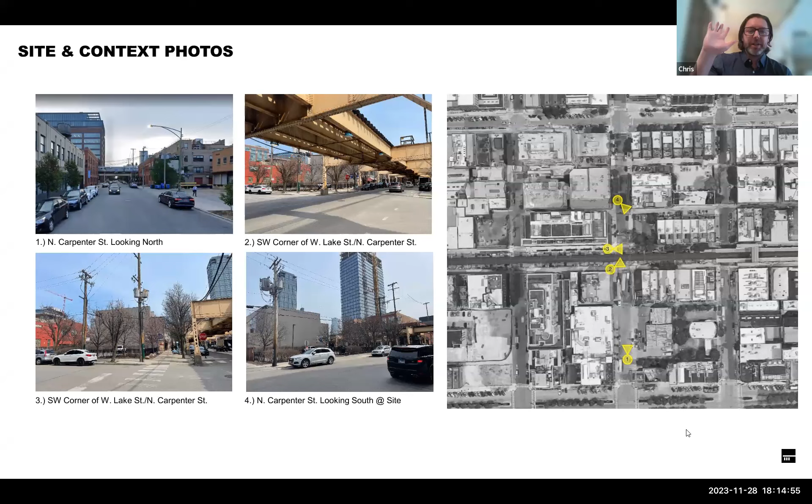Hi, I'm Chris. I lead the global architecture practice for Moser. My colleagues Jason and Roshni are going to speak a little bit about the building, its impact on the community, and the sustainability objectives that we're incorporating into the building.

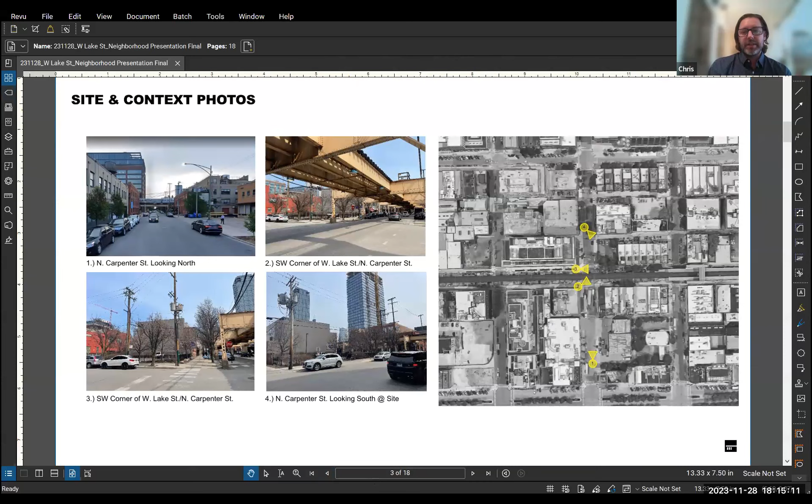Here's a few shots of the site that everyone's speaking about, that I think many of you are familiar with, at the corner of Lake and Carpenter. Go to the next slide, Jason.

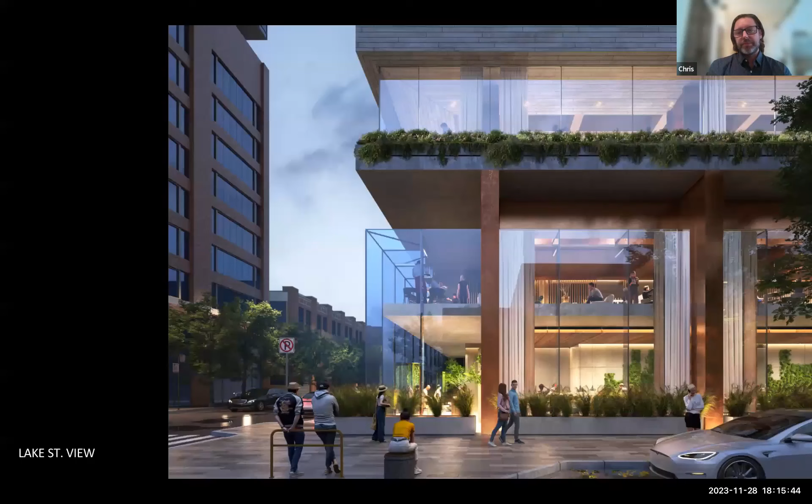Next slide, Jason. I'm going to pass it over to Jason to go through each one of the views that we've developed, and then to Roshni to talk about the sustainability objectives.

Good evening, everyone. So just to go through a few of the images here. First, we have the Lake Street view. This is right at the corner of Lake Street and North Carpenter, showing the amenity space as well as the entrance of the building.

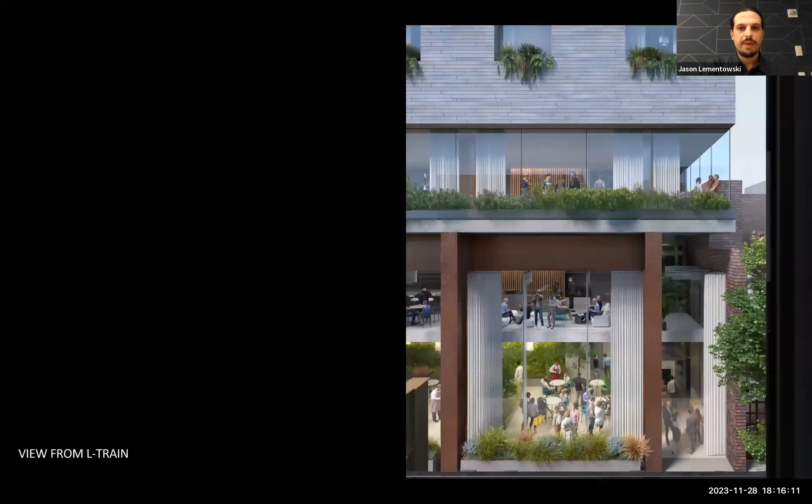I'll just kind of pass through these. The next view is from the elevated train line, so it shows that we still have the connection between the hotel space to the community. There's that visual connection.

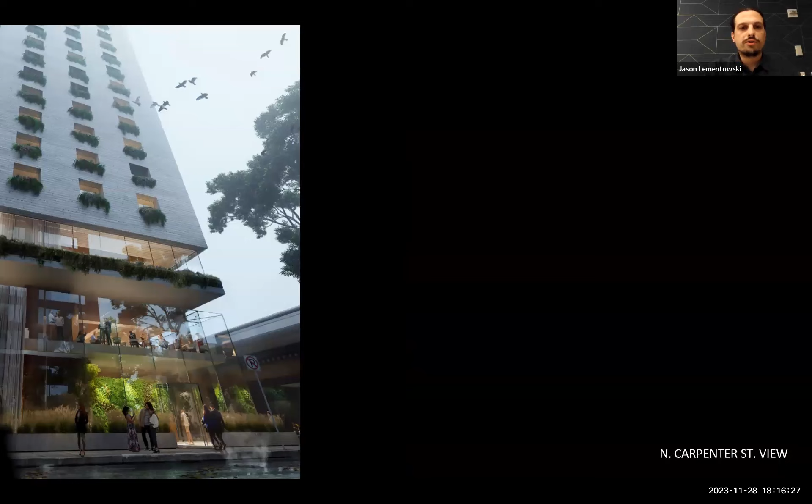Moving along North Carpenter Street, again, just showing how we have the biophilia and the materials contrasting, but then playing with the existing infrastructure that is on our surrounding site.

Just to give a quick breakdown of the building program: the first 3 floors are amenity spaces, and then moving up we have 11 floors of hoteling, with a rooftop lounge at the top.

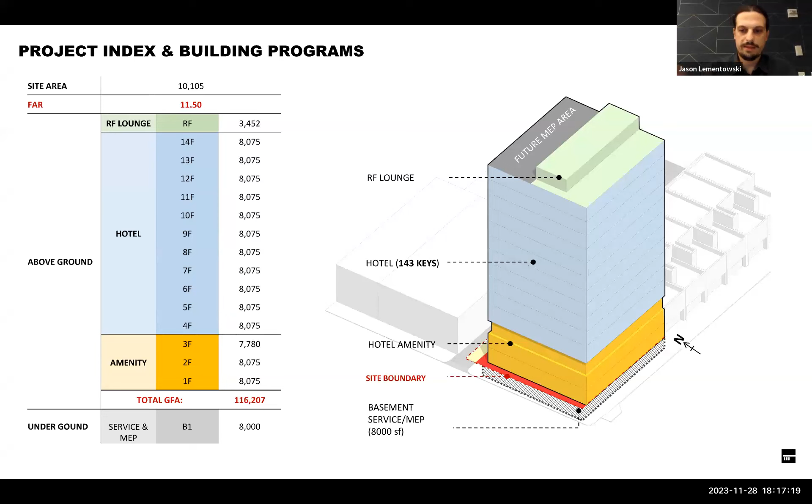Like Errol, I have a great affinity for Chicago. I went to the Art Institute of Chicago, and what we're really trying to do with the ownership team is develop a building that is focused on the community, but also incorporates being in harmony with nature.

Roshni is going to take us through some of the sustainability objectives that we have, as the team has been mentioning. This building is in alignment with Chicago's climate action plan, and actually exceeds many of the goals that Chicago has laid out. Over to you, Roshni, to go through the next slides.

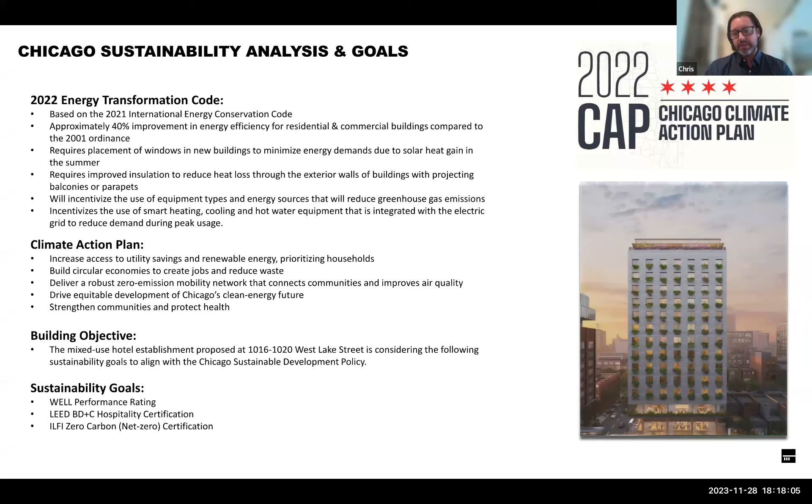Thank you, Chris. That's a good segue into looking at the various sustainability features that this building is going to consider and build on. We are considering WELL, LEED, and net zero, but essentially we want to focus on human health, minimize impact on carbon, and build a beautiful building with healthy materials. So when you look at WELL, we consider air, water, light, thermal, taking into account the occupant experience as well as some monitoring scope.

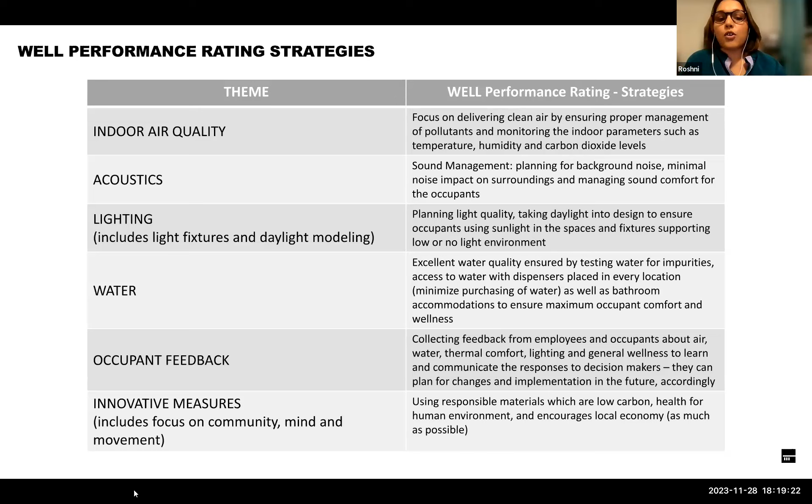The overarching theme of WELL is human-centric. So you build a building that is focused on clean air, great acoustical comfort, lighting, you optimize daylight, make use of beautiful sunlight, and only plan for fixtures that are actually required, clean water free of impurities, take into account what the occupants are actually saying about the building, and communicate these responses to the decision makers, as well as take innovative measures. Here we focus on other things like air, water, sound, and in innovation we would focus on community, mind, and movement.

For LEED, we are also focusing on various 9 categories within LEED that's focused on hospitality. So we have various themes across LEED certification, starting with site protection.

We would improve the land and soil quality by doing brownfield remediation. We have optimized the site by picking a very accessible location, having walkable streets, access to outdoor nature, and also planning for efficient energy planning, with a model that has technology integrated and makes use of on-site renewables so that we optimize for energy planning.

We would use the best materials to ensure low VOCs within the building, as well as excellent recycling programs to divert waste from the landfill and ensure that we are playing that part in the community. Apart from that, we also have other indoor air quality, acoustics, and lighting metrics within LEED that would enhance the performance of the building. Next slide, please.

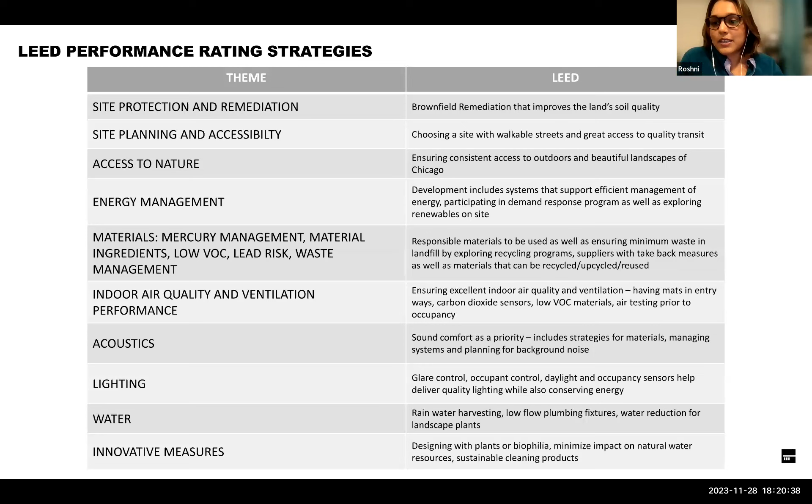And finally, net zero. So we are going for the net zero certification for this property. And there are two themes within this certification: one would be operational and the other would be embodied carbon.

Operational carbon is essentially whatever activities are associated with the building performance. A classic example would be lighting. So we would ensure no burning, no combustion. We would not utilize fossil fuels. We would reduce the carbon footprint by choosing really good technologies and electrical systems to ensure minimum carbon footprint when it comes to operational side of things.

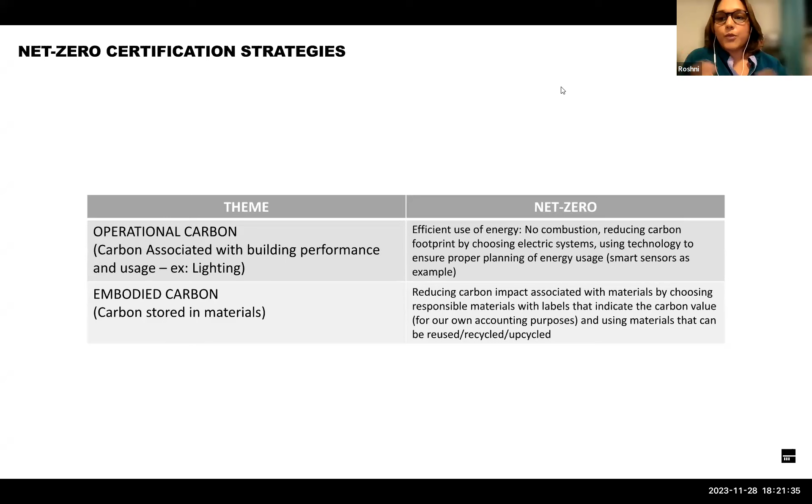And within embodied carbon, whatever carbon that's stored in materials, so we would choose low carbon materials, carbon neutral materials, and materials that can be recycled, upcycled, or reused. We would ensure that overall the building would have low carbon footprint and achieve net zero in the end.

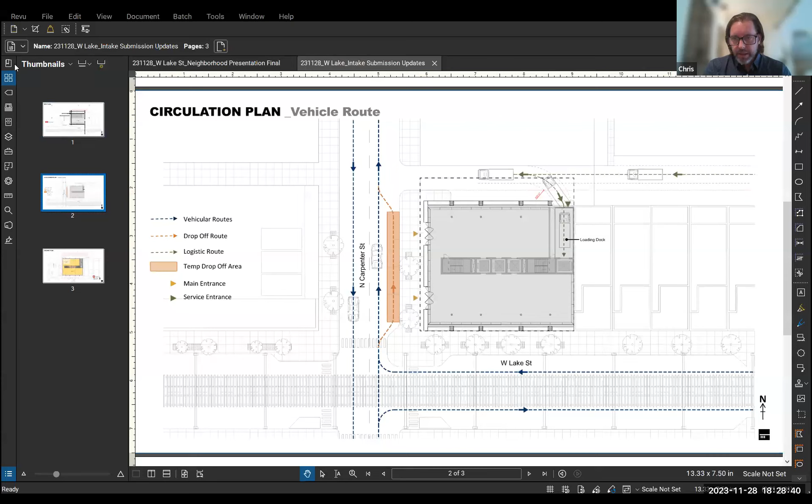While he's doing that, the next question on traffic, I think, is whether a traffic signal would be required. I think the question is whether it would be warranted, and I believe our traffic consultant has concluded that it is not yet warranted, but we'd certainly be open to a traffic signal being installed at that location.

I live 2 blocks from here. I appreciate the question very much, and I'd like to see one installed there as well, but I don't know whether the warrants have been met. To the questioner, I will get an answer back to you offline.

I'm looking for it. So for vehicular routing, there's a drop-off area and valet on North Carpenter. And then in the alleyway behind will be loading, but there's a loading dock berth at the back of the building, where trucks will pull in, park, pick up, unload, and leave. So there will be no restriction of access to the alley.

Which this visual shows. And the other thing we've been working with CDOT on is that the loading area will occur internally, so there will not be any blockage of the alley there. It's actually for the benefit of the people listening—it's actually a private alley.

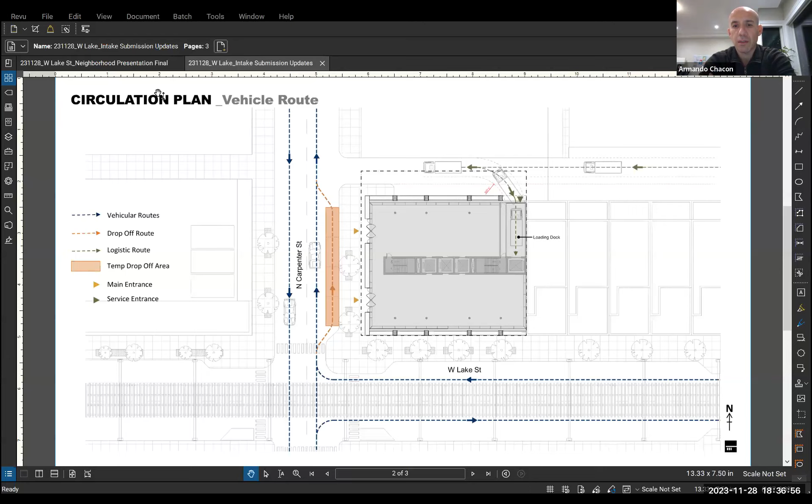I'm not in the hospitality business, but what's the amount of traffic for a hotel of this size when it comes to trucks, and the unloading and loading needed for a hotel? Is one stall enough? Is it more than enough? Are there certain times it will be used more? What information can you provide on that?

Jillian's team, who operates many hotels, has given us the amount of general loading and unloading, and this loading dock berth is more than sufficient for this size of hotel. We've worked with quite a few hotels that have around 140 rooms, and there are standard vendors that most hotels use. The schedule is such that certain vendors know their day is Tuesday, their day is Wednesday, so it behooves everybody to coordinate and stagger it. We haven't seen a challenge with this number of rooms and this amount of loading and unloading.

When you look at the average delivery, some days, depending on food and beverage, there are as little as 2 or 3 mid-size box trucks coming in over the entire day, and it never gets above 4 or 5. It's just not that kind of demand.

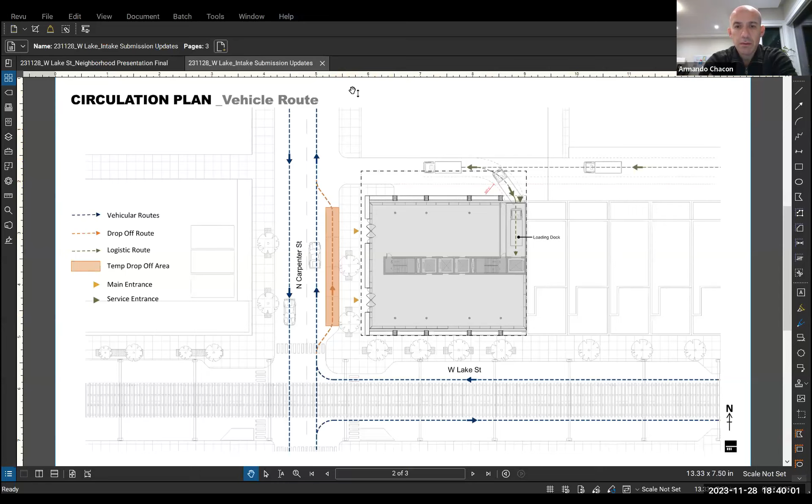Do you have a rendering that shows that? I believe you do, correct? Yeah, if you could go back, Jason, to the Carpenter Street shot that's looking across the street from the Google building.

And those are real plants, correct? That are on the... yeah, that's real plants. So, as you know, it's very cold today and for the next few months. How will those plants live, or would they need to be? Yeah, we're working with vegetation experts that have implemented this type of strategy in this climate, and they will actually be non-dormant for about 10 months of the year. They may be dormant for 2. So they stay alive. They won't always be evergreen, but they will stay alive, yes. Kind of like grass. Yeah, the grasses, natural grasses, those types of things.

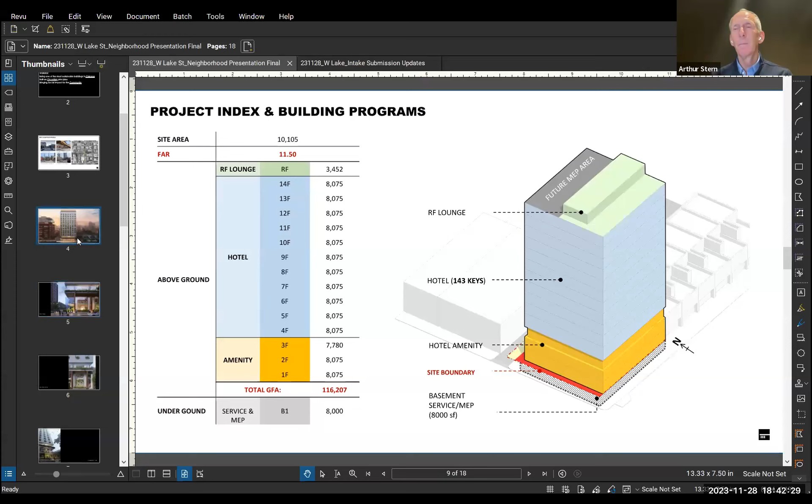Jason, can you go back to the full Carpenter Street? There we go. So that'll give you a better feel for the inside and outside and lobby entrance.

Are you on the property line there on this corner, or are you set back at all? The building you're referencing? Correct. Everything is set back a little bit, yes. We're maximizing the lot and the height for ownership, but there are some setbacks, like Richard mentioned earlier, to accommodate certain things, though we're not required to.

Thank you, Jonathan, appreciate your kind words. I think we've answered all the questions now to the best of our abilities, and I know I owe follow-up to Matt on a couple, which I will provide. I suspect that the alderman is probably not able to close the meeting, but I'll wish everyone well and remind everyone that this is something that he will take under advisement and will revert to the local community organizations and respond to questions and concerns that they might have.

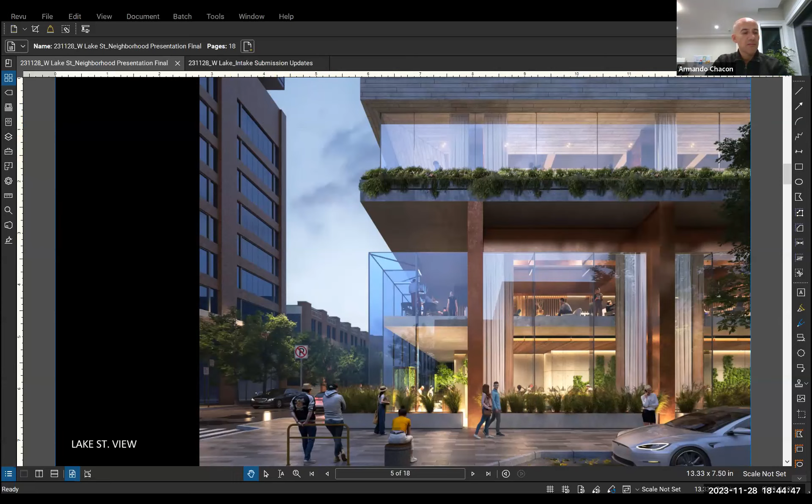We really appreciate it. Our best to Carla. Take care. Thank you very much, everybody. We sincerely appreciate it. Thank you. Take care. Bye-bye. Bye.